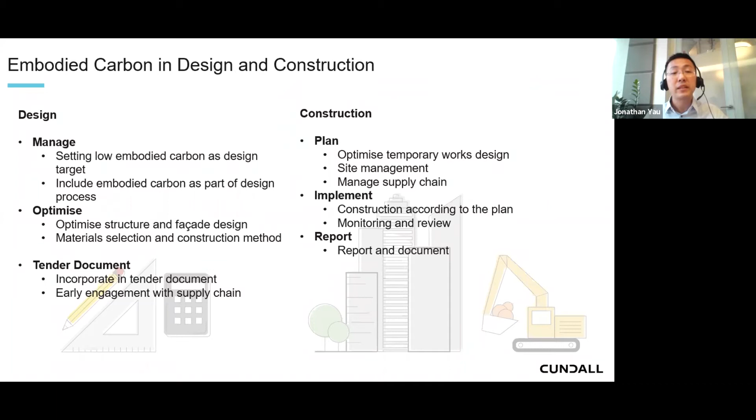So recently we have been appointed by the Construction Industry Council in Hong Kong. They are the official council setting lots of standards for the whole industry. One challenge we found globally is that many people are looking at embodied carbon, but not often do we get an industry-wide standard for the whole country or city. So this is exactly where it's coming from: trying to manage the embodied carbon in design and construction stage under the same common platform. Helen is going to talk about more details later.

But essentially, using the same approach, we're now doing lots of embodied carbon consulting projects, from standard development, research, tools development, engagement with policymakers, government, developers, supply chain, contractors, and also doing trainings and project consultancy. So we are now working in this area to help the industry tackle embodied carbon. Now I'll pass the time to Helen to talk more about the details of embodied carbon and how we manage them in the process.

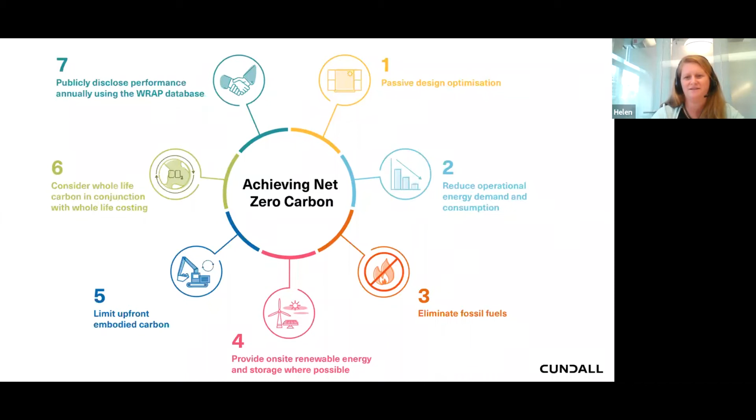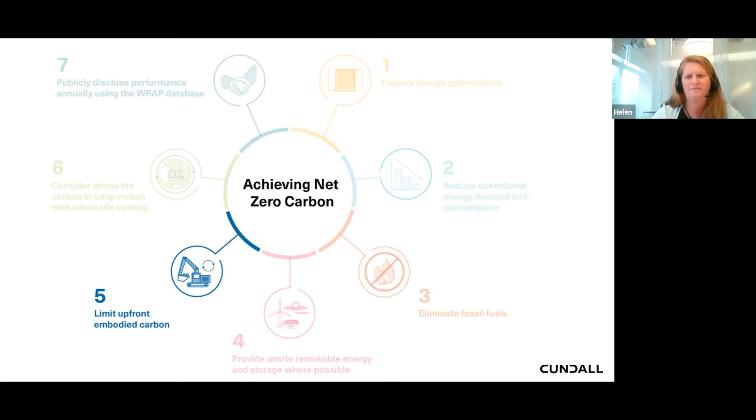But today, I'm just going to focus on step 5, so limiting the upfront embodied carbon, so looking at the impact that our buildings have before they become operational, and how we can look to reduce those through design and construction.

So what do we mean by upfront embodied carbon? There is the life cycle assessment, which is used widely, and it's not a new concept. But when we look at it in the process of the building life cycle, from the material extraction all the way through to the reuse and recycle and recover at the end of its life. So looking at how that building both is built and as well as it's used and what happens at the end. The key part, what we term upfront embodied carbon, covers the stages A1 to A5.

This is looking at the raw material extraction, the transportation of those materials, the manufacture of the materials, and then actually the installation on site. A lot of life cycle assessment tools cover these stages as well as the latter stages, but for the purpose of this presentation, we just look at the front end.

And I think this aim is to demonstrate how embodied carbon is going to become more important and more influential in the long-term journey towards net zero carbon. Currently, energy globally is decarbonizing, and the carbon intensity of the electricity grids is becoming less. When you look at the contribution of the built environment in terms of carbon emissions, 39% of those globally come from the built environment, of which in 2019, around 11% were actually from the embodied carbon, so the upfront.

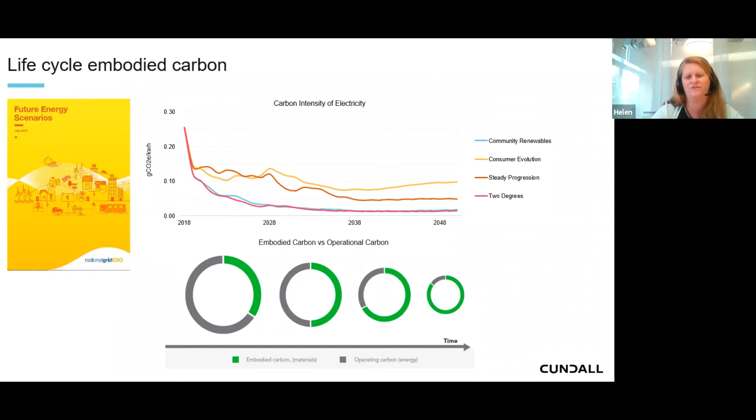But while we decarbonize and make the operational carbon decrease, it only will increase the impact and the significance of embodied carbon over time unless we address it and try and do something about it. So, as I said, life cycle assessment is not a new concept. There's many tools out there that are able to be used for carrying out embodied carbon assessments, be it for construction as well as other sectors.

There is a new tool that was launched in beta version at the end of last year called EC3, which I haven't included on this slide, but it's one that's designed specifically for the construction industry and has the ability to have benchmarks. So it's expected that that will really help drive the industry forward globally at this time.

So just to give a bit of background into what Cundall have done. We are finishing up a project at the moment working with the Greater London Authority to help the implementation of the new London Plan. Part of that plan requires all planning applications that are referred to the Mayor for approval to have had a whole life cycle carbon assessment carried out. So that's looking at the full life cycle, more than just the upfront embodied carbon, but its impact in operation and decommissioning or disposal at the end.

So we worked with this policy and this vision to create guidelines that can be used by the industry, with methodologies and tools that could be used, as well as setting up benchmarks within that system that applicants can use. So this should really drive the industry to change within London. It's not published officially yet, but it's in progress as we speak.

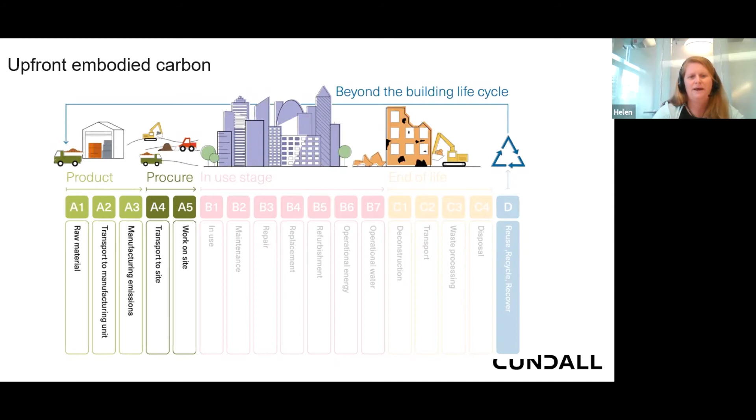So as I said, we only look at the upfront carbon. But what does that actually represent in terms of the tool and in terms of the whole life cycle carbon? So when we look at it, we are focusing on the superstructure, the substructure, and the facade. So what we term the core and shell for projects, along with the transportation of the materials and the on-site impact. So as this graphic shows from the LETI guidance that was published last year in London, this makes up more than half of the total whole life carbon.

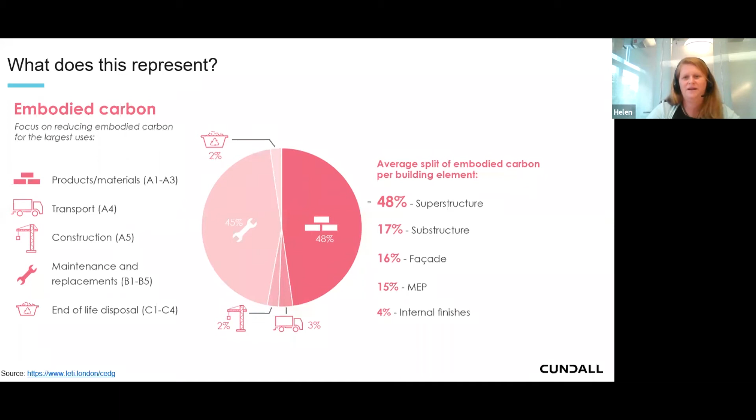We don't actually cover MEP and internal finishes at the moment within our tool, mainly because the industry needed to start understanding and reporting its impact. And the materials that make up the substructure, superstructure, and facade are very common materials with standard specifications, which makes it easier for us to create a database and an ability for people to report. Also, our experience was that it's much harder to find clear information on the impact of MEP services and internal finishes in terms of embodied carbon. So we felt that this is the starting point.

And probably to explain that a bit more, the struggle that we had in Hong Kong is that we don't have a database currently in Hong Kong. So as part of the project, we had to work to develop that database. Hong Kong imports most of its construction materials except for concrete and asphalt, and we do also have a cement manufacturer, but most of the construction materials are imported. Therefore, we worked with the supply chain, using Hong Kong trade statistics over a period of time to understand where the materials were coming from, so that we can get representative data rather than using a standard database. So we wanted to develop one that's localized to Hong Kong.

So when we found out where these materials were coming from, we then looked for product declarations, which give the information about the embodied carbon of a given product. Where they weren't available, we then looked at international and regional life cycle databases. There is one in China, which we used heavily because a lot of materials are coming in from mainland China into Hong Kong. For concrete, we had to do some calculations looking at mix types in Hong Kong and making sure that the concrete numbers were correct for Hong Kong, along with using the life cycle carbon assessment tool that Hong Kong has for products. So we incorporated all of those, and then looked at how the materials are getting to Hong Kong and how they're transported within Hong Kong as well.

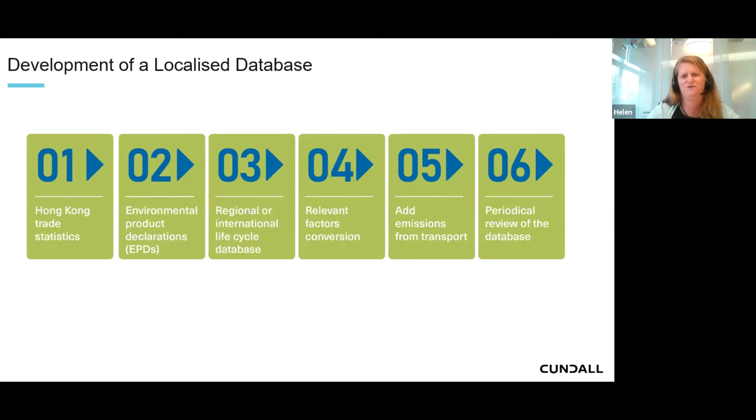So how can we look at this in terms of design and what can we do? So the greatest saving potential lies in the design. Building less and building clever really does give us the opportunity to reduce the impact that the buildings have before they're constructed. So design optimization, therefore, is fundamental to how we go about looking to reduce the embodied carbon of projects. And as many structural engineers go about optimizing their design, there are many things they look at, such as cost, buildability, structural performance. So we believe that the best way to make embodied carbon a consideration is to actually include that at the front as well. So it becomes just another method of being able to rate the performance of a structure when you're comparing designs.

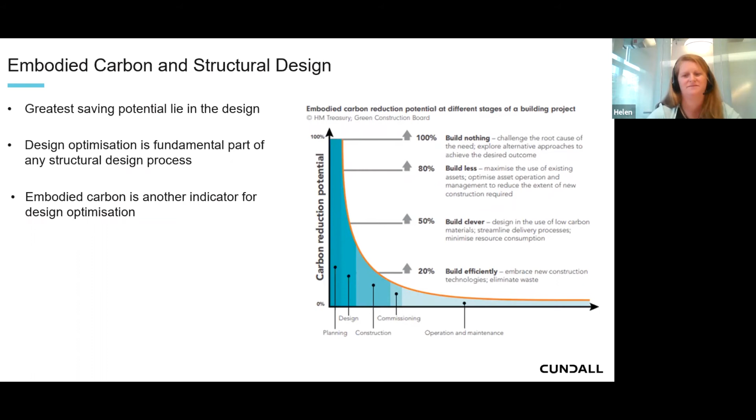So achieving reductions in embodied carbon, there's many ways to look at this through design and specification. So looking at utilization of different structural forms often can save resources and materials, so that can also reduce the embodied carbon early on, but still provide the same structural performance that's required. Looking at modular construction and off-site fabrication as a way of reducing the wastage. And also by going down these routes, you're able to look at different ways of designing as well.

Looking at what's going to happen for the building in demolition. Although it's not considered within the CIC tool, looking at how the building will be demolished or could be reused or reformatted in future usage is important upfront. Along with when it comes to specifying materials, looking at low carbon alternatives. We're working on a project, and just changing the specification of the material actually can have a big impact on the overall embodied carbon of that project.

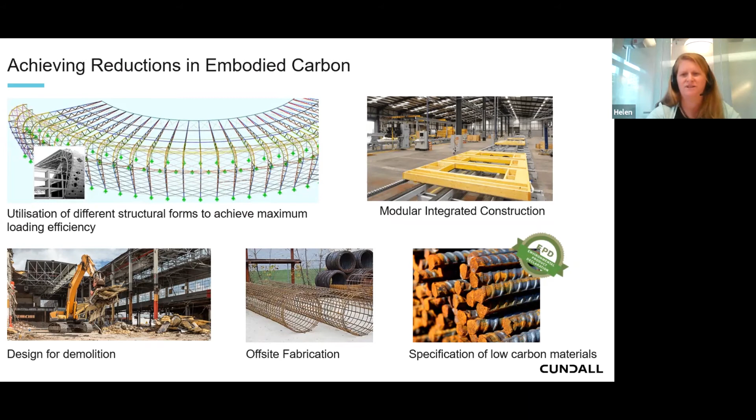So how we're looking to use the carbon assessment tool in Hong Kong in our designs from a structural perspective is looking at the materials quantities output from BIM or Revit models, which are obviously developed throughout the design process and provide a really key source of information. And feeding that information into the carbon assessment tool can give us an understanding of what the embodied carbon saving could be of changes in design form.

Within the carbon assessment tool, there is the opportunity to actually compare options. So we can compare two design options and demonstrate the saving, and that can then become the baseline for the project going forward.

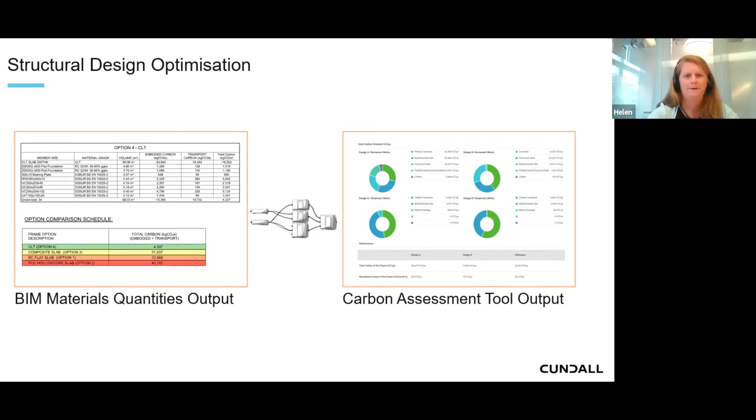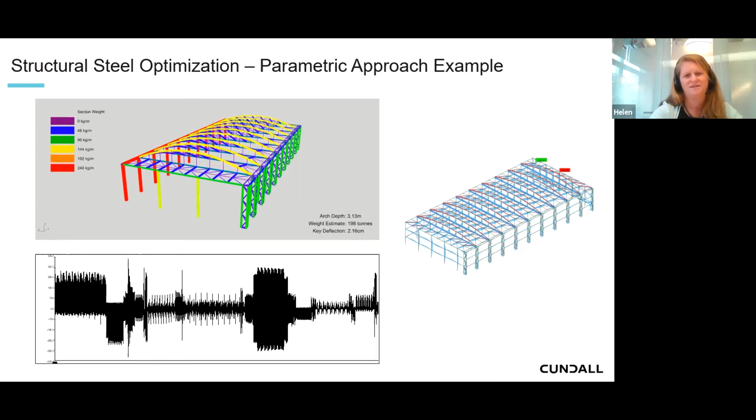Just to give an example of a project that we've used the carbon assessment tool on, this is the structural design of a swimming pool, and we were looking at changing the roof of that pool and how the redesigning of that can impact on the amount of materials that are used within it. So as the graphic is showing, the changing in the arch depth has a direct impact in the quantity of materials that's used, and then taking the worst case and the best case in terms of material usage, putting that information into the tool just on this one structural steel element, you can achieve a saving of 37 tons of carbon for a very small structure.

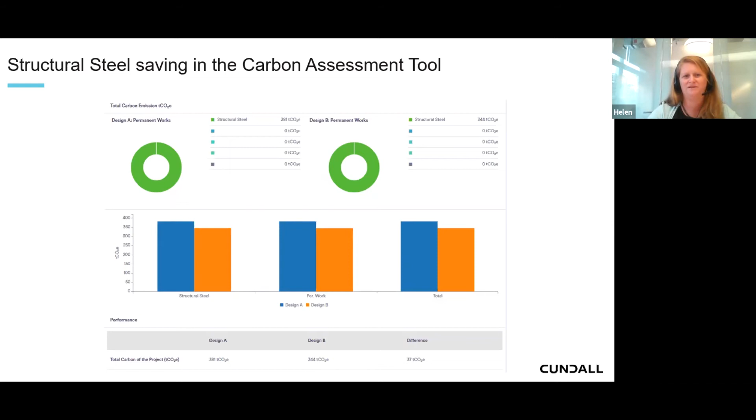And that doesn't take into account the reduction in the weight of the structure and what that would mean for other materials within, including the substructure. So I think just looking and understanding where materials are being used and what impact that has in terms of the embodied carbon is a really useful output from the tool. But you don't necessarily need to be able to use the carbon assessment tool to be able to do that.

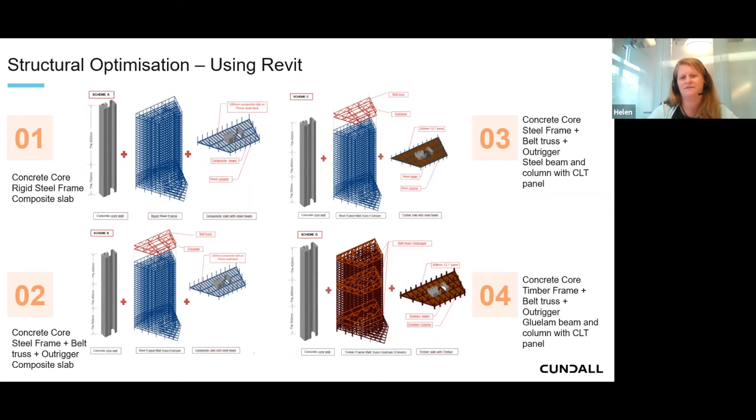This is a project that was done using Revit. One of the core requirements of the client was to consider the embodied carbon impact of the project. So all these 4 designs were design options that were considered, all of them having a central concrete core and then different framing and slab types, all of them therefore having a completely different embodied carbon impact.

And obviously scheme D, which is a timber structure, is the best performing, the most efficient in terms of embodied carbon, but it wasn't chosen as the design that was taken because other considerations were made, such as structural efficiency, cost, materials, and ease of construction. But even looking from scheme A to scheme C, there is a saving of around 5,000 tons of carbon, which is substantial, even if you don't go all the way to a timber structure, which would give you the most saving.

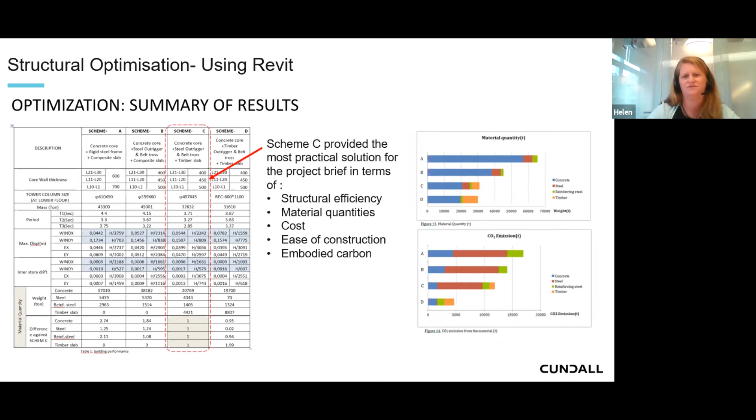So once we've looked at the design and optimized the design, then it's about looking at how we can reduce the impact in construction.

So it's about building efficiently. The design really does influence how a contractor can build a project. So considering the construction and streamlining that process in the design can also help massively when it comes to construction in terms of saving embodied carbon. And there are additional ways through material selection and sustainable site management that can also reduce the carbon impact of the projects.

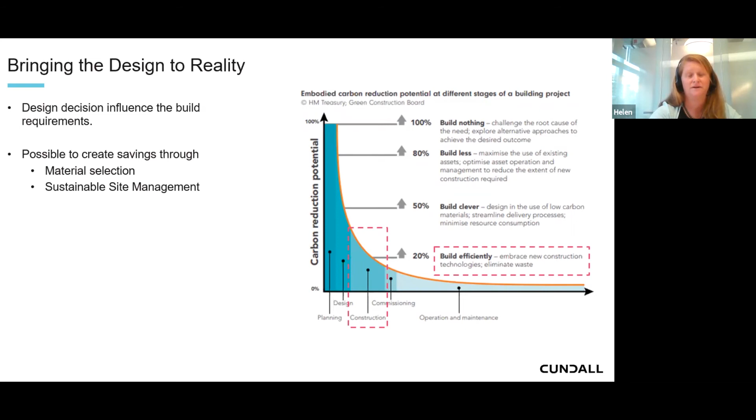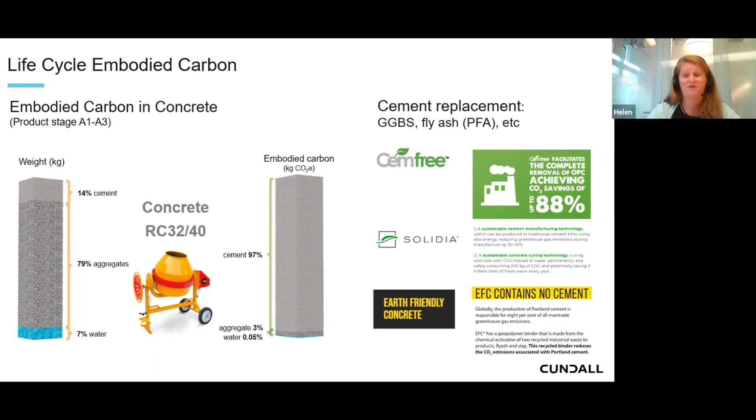And making choices in terms of the specification of the material is a good way of being able to minimize embodied carbon without having to change the design if it doesn't enable a lesser embodied carbon product at the end. Obviously, governments, building departments have their own requirements. Here in Hong Kong, we are limited by how much cement replacement we can use because of building code. But there's a lot of innovation and research going into it globally, and hopefully we can start to see some replacements coming into Hong Kong, as well as how it's used globally in other countries.

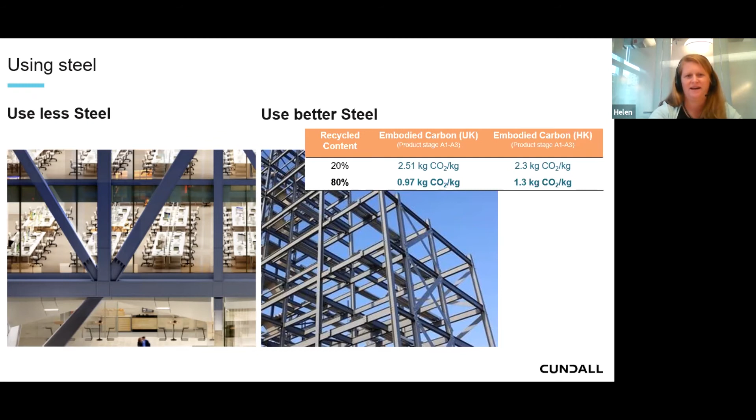And then looking at modular construction or kit of parts. So the major use of embodied carbon in buildings is in the superstructure. So it's possible to look at modular construction for many other reasons than just embodied carbon, but just by doing that, there is on average 10% less carbon involved by the nature of the way that the materials are produced. There tends to also be a lot less wastage on site, and it's also easier and quicker to build.

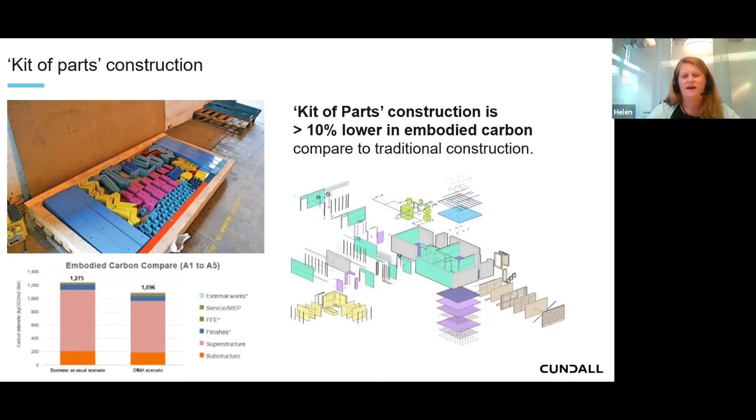And then finally, looking at good construction management practice. So obviously every construction site is very individual and has a lot of constraints that impact on its ability to deliver low carbon construction. But there's always opportunities and innovations that can be implemented and used on projects. If we take, for example, early connection to the grid is a great way of being able to reduce energy. But if that's not possible, then looking at having high performance generators or hybrid generators that can use biofuel instead of diesel, looking at setting idle timers, just all different ways of being able to reduce those carbon emissions.

Along with waste, and looking at waste not as an end product, but as a product for something else. So looking at ways to, first of all, reduce the waste, but then look at other outlets for it rather than it ending up in landfill or being sent for recycling. Then another thing is the use of BIM. Using BIM on projects can also help again with modular construction, but it can also help in removing the need for abortive works. In Hong Kong, abortive works are quite common on projects, and you can really see the impact that has in terms of wastage and therefore embodied carbon.

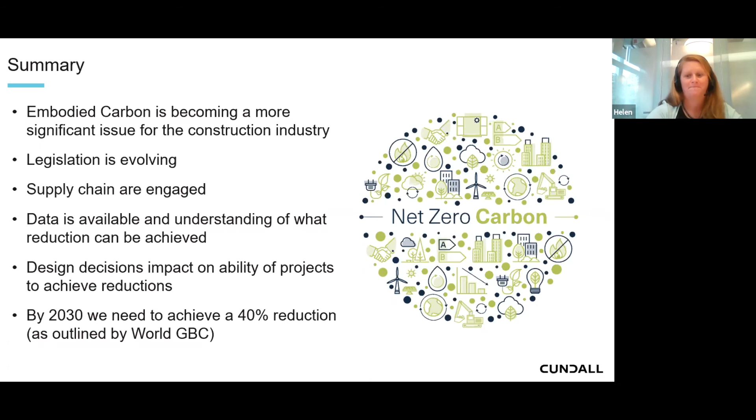So we have a few questions come through. Firstly: do you think embodied carbon benchmarks used by the industry accurately capture the transportation-related impacts of getting materials to site, for example, taking full account of the fact that some building components may have traveled internationally several times over during the manufacturing and assembly process?

So I'll take that one. To give context to what we've done in Hong Kong, life cycle assessments and environmental product declarations declare the emissions of the transportation of the material from extraction to the end of manufacture, so cradle to manufacturing gate. And so those emissions on the whole are very well captured. The transportation emissions from manufacturer to site are, as a percentage, quite low in terms of the total upfront embodied carbon of the material. So we did capture it.

We assumed different modes of transport to get to Hong Kong and within Hong Kong. But again, knowledge is power, and it's about understanding and working with the supply chain to actually get the right data. But its actual contribution is quite small when looking at the overall total embodied carbon from A1 to A4, so for when it gets to the site to be installed.